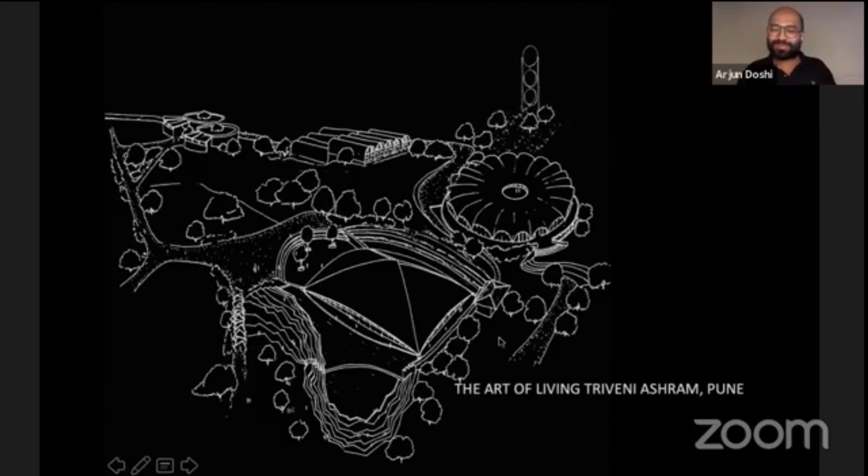Thank you, Anish. Thank you, Rizvi, for such an amazing presentation. Lot to talk about it. Thank you, Anish, Design Owl. Thank you, Srini, it is great. I think we're not doing justice meeting Srini over the virtual platform. Meeting him in person is quite exciting, and there's a lot of energy around him, and that gets probably passed on to you somehow.

This is the barren part of Pune, the northeast part, where as you go towards the Marathwada side the land becomes barren, and the actual topography is all contoured with a lot of hard rock available. So this is a 300-acre site, out of which today I'll just be showing you around 30 acres, which has been developed currently. There have been other parts touched upon, but not yet developed completely.

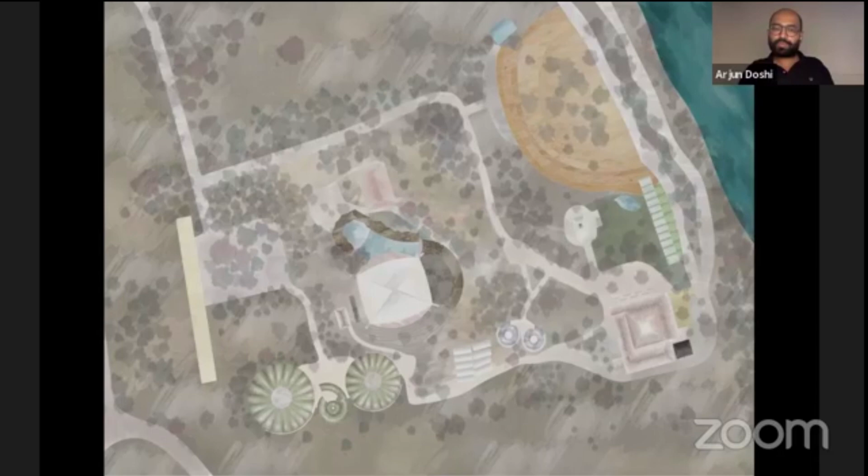So when we got this project originally, the client was actually looking to build something as a temporary structure. So we started with this small structure, a doctor's cabin. They have something called Panchakarma Kriya, wherein they use techniques to vitalize all the human body points, with a proper professional doctor for that. But they did not know if it would work in Pune, in the ashram, what kind of response they would get. So at that time, they wanted a small pavilion kind of thing.

It had a very tight budget. So what we did is we purchased this pine which was locally available because of Mercedes-Benz and Jaguar companies based on the industrial belt of Pune, where this material is used, in which the cars come packed. So this is actually material which is used for packaging of these cars.

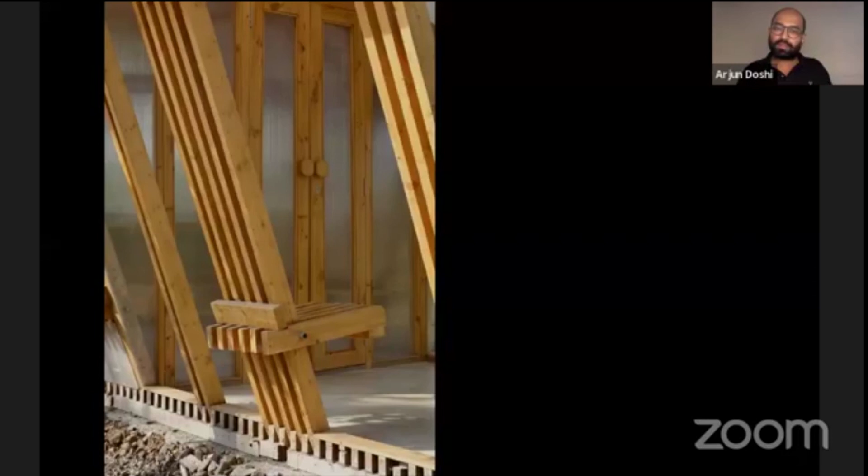So if you see, these are all nail marks on top of this. So we just rubbed it on top. The structure was that the complete structure was just bolted on this half-inch GI pipe. So the whole structure was sealed through that. There were no nails used to tighten the structure.

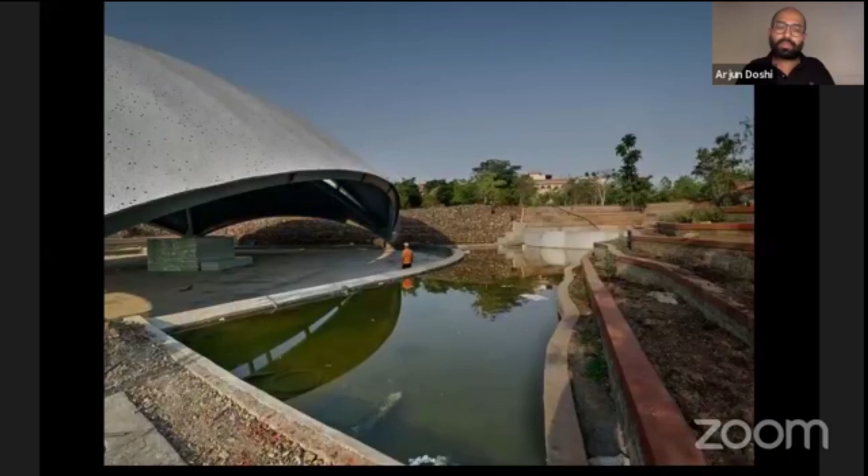It has a metal frame covered with ferro cement as a skin roof. This just sits grounded on 4 points. When we were discussing, there were specific kinds of requirements for the structure. So we went ahead and studied all the Vastu, what basically is required in Vastu, and we worked out the complete sun movement which the Vastu revolves around.

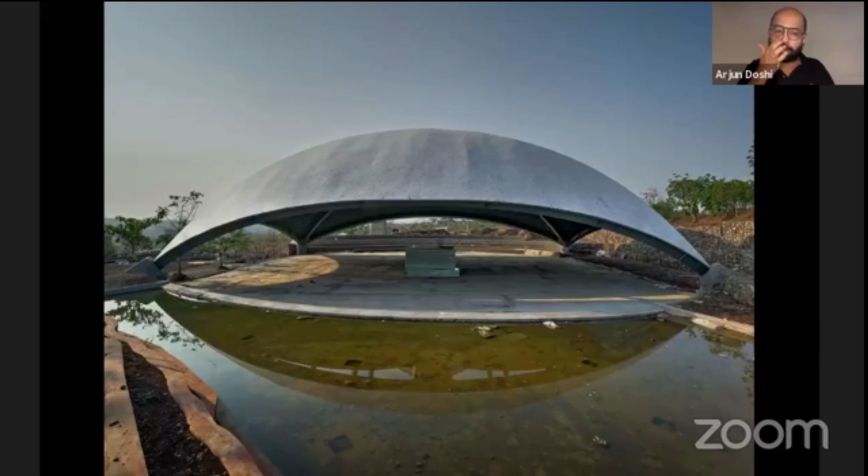And we were able to add a landscape around it because of that. So we were able to add a water body in the northeast which already had depression. We cut some on the western side and filled a little bit on the eastern side, and it was exactly situated northeast facing.

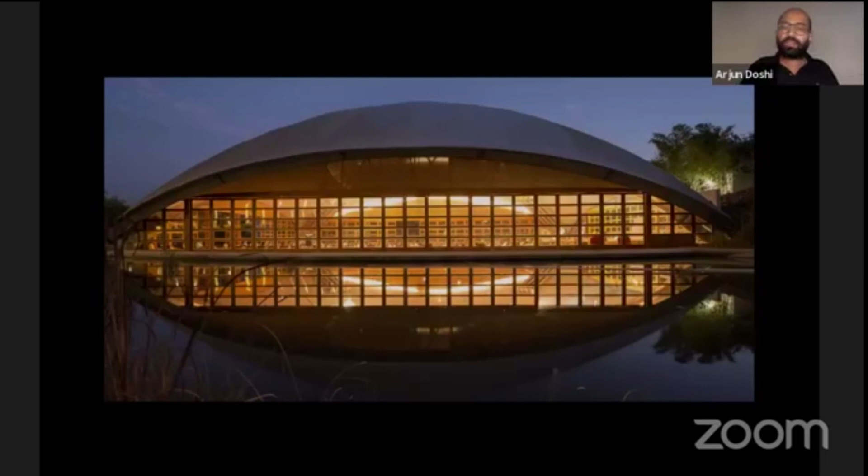And what we did is, because it was a ferro cement roof, we cut the roof in two, so the hot air could escape. Ferro cement being thin attracts a lot of heat, so the heat could escape through the void. And to naturally ventilate it or cool it in the months of summer, monsoon and otherwise, Pune is beautiful, so we don't have to worry much about the kind of heat it attracts.

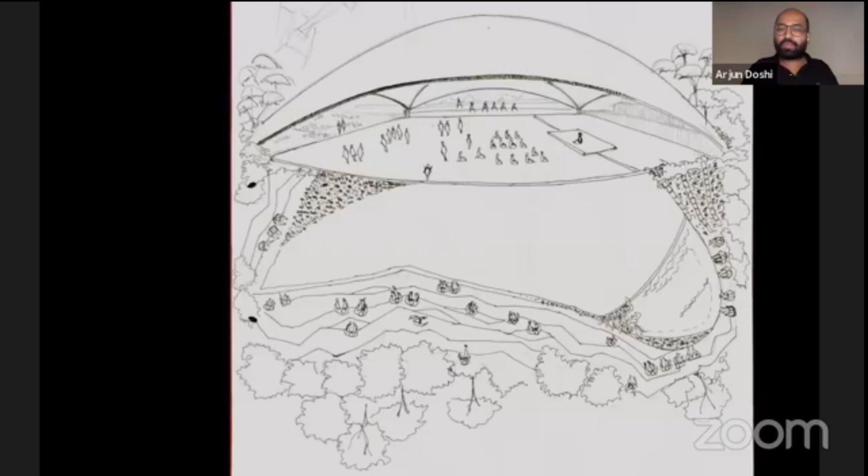It is the summers, the 2 months of summer, which was a point of question, when they used to use the hall quite frequently. So what we did is we created a landscape which would attract passive cooling. This waterfall is a movement of water around the site, triggered every time the pump is switched on, pumping water to the overhead tank, and eventually falling into the hall periphery, which cools the hall on the eastern side. And the cut and fill is the part which we did.

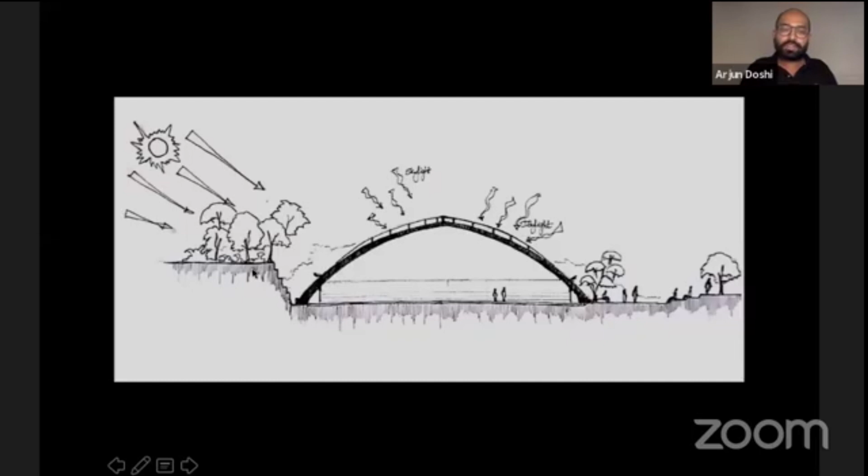So this is the west. We cut on the western side, so the shading of the trees could be done in the afternoon, so all the cool, heavy air could travel down and cool this bottom. And on the eastern side, we have the small entry pavilion kind of thing, wherein people passing by do not disturb the users of this hall if the doors are open.

So it was a typical metal frame structure on which the ferro cement was casted. To reduce the cost further, what we did is we disconnected the four foundations, and because of that disconnection, all four foundations were independent, and the ferro cement was directly tied on.

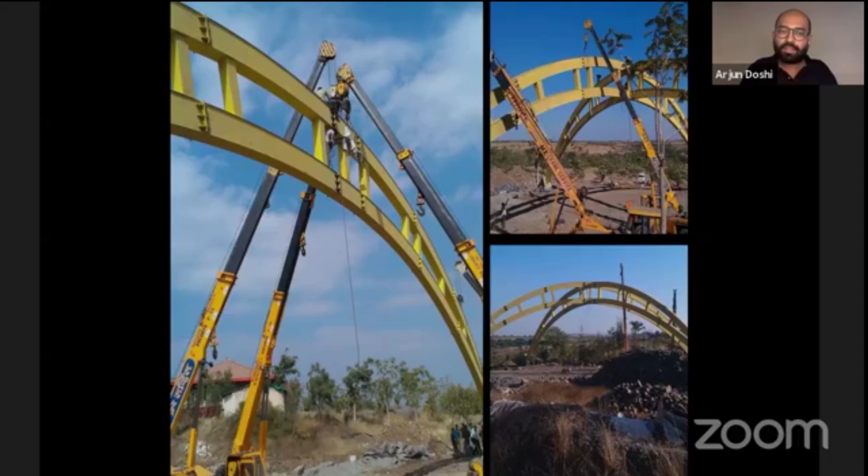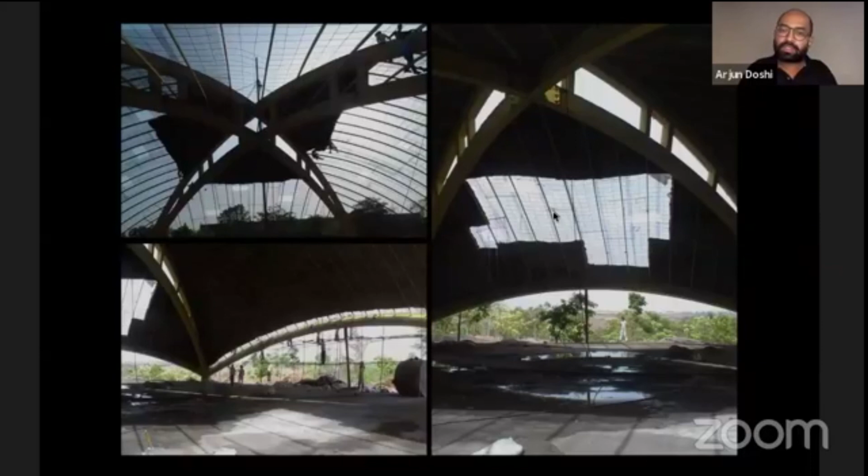So this is the kind of process which we went through. While casting, we had to cast in a manner wherein the weight was added at a certain point, and like a snail, you keep on rolling it up. So the whole structure, when it settles down, will push out the foundations in a simultaneous manner.

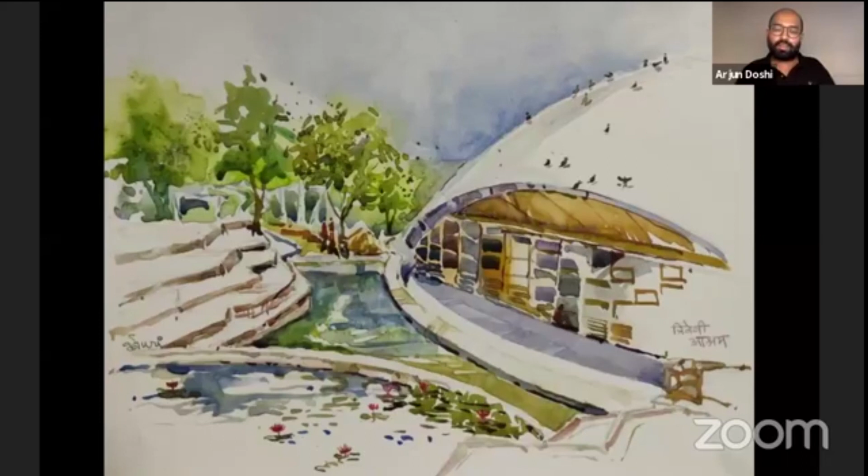As I said, we concentrated a lot on the landscape because for the pavilion, landscape played a major role, since the pavilion was just like a roof on top. But we imagined people using the space throughout the day for some kind of meditation, yoga, or any kind of course, used for multi-purpose courses of all different kinds.

Our imagination was that if a person has to spend 8 hours within this, what he sees outside should be as comfortable as possible, because the region was quite harsh in the month of summer. Everything will dry down, the whole landscape will be golden. So the landscape changes color throughout the season - winters is different, monsoon is different, and summers becomes absolutely golden.

Everything dries up. And this water is also the irrigation water, the grey water, which is recirculated throughout the ashram, which keeps on filtering by sedimentary filters.

Even the entry pavilion, the client had an imagination of a grand entry. So we created a pavilion for the entry, wherein they pass through a series of boxes where they lose their orientation by the time they are at the entrance of the pavilion.

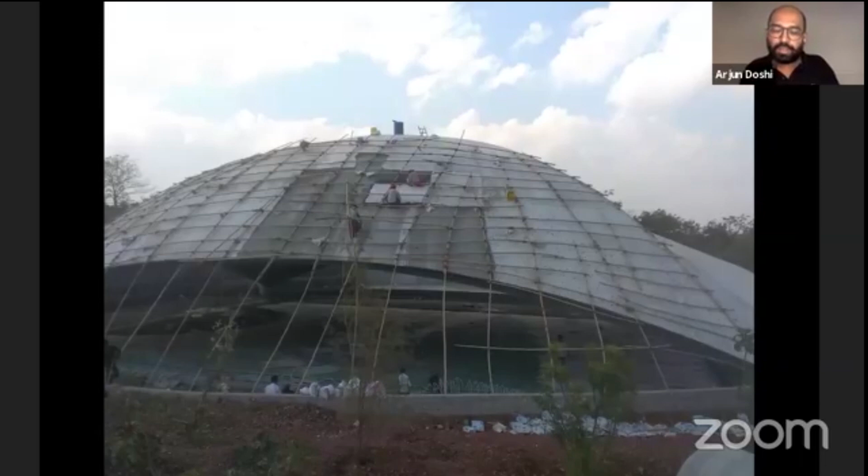A little bit about the construction process. After we had completed all the ferro cement and metal work, there were a few challenges we faced while doing the China mosaic and curing it. We did this China mosaic as insulation and a weatherproofing material. Cement didn't work here because you couldn't work under it the next day - you had to pour water on top to cure this part while working below.

So we introduced lime as a material, which also added to the insulation of the complete structure. And after the China mosaic was complete, we also added radiant cooling in the flooring.

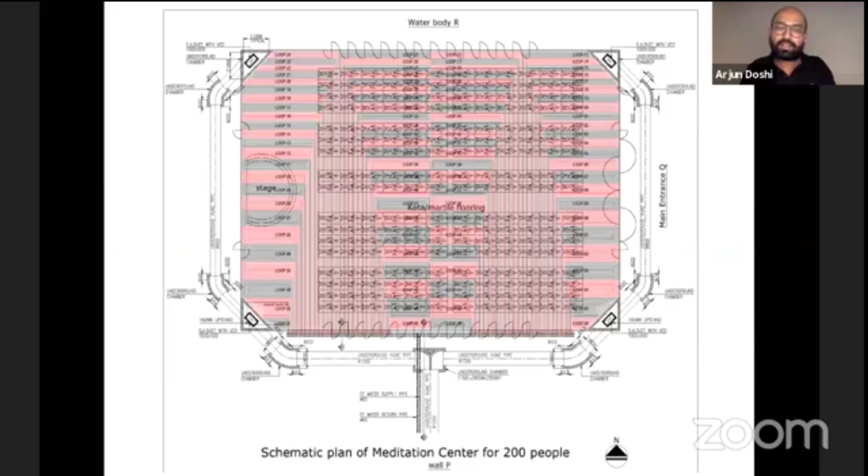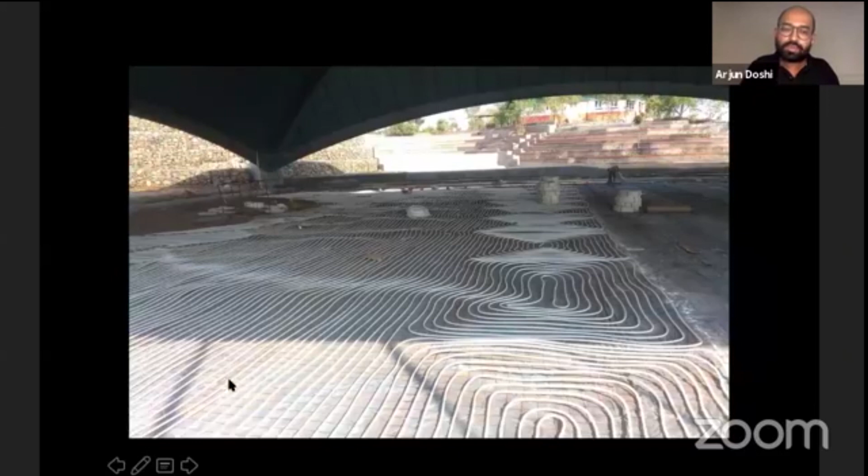So this complete floor is radiated with cold water. We pass 18 degree water in summers, which cools the complete floor you're sitting on. Each pipe length was worked out in a manner that the water traveling time is equal to the start and stop time.

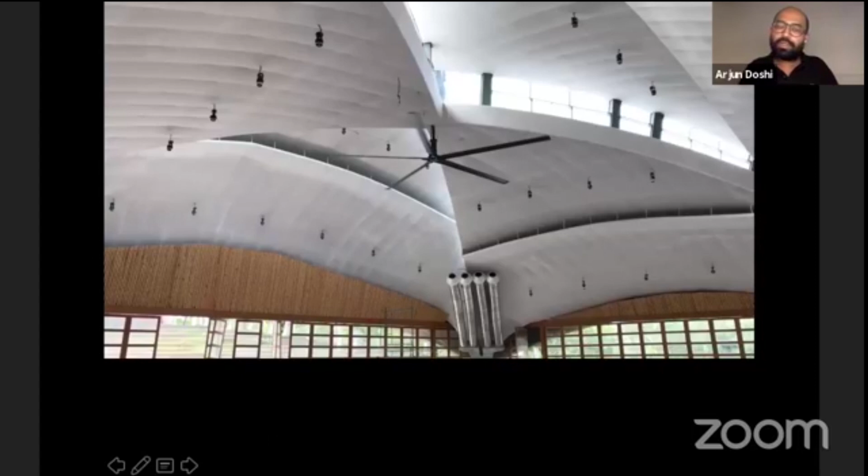We also added this HVLS fan and radiant cooling system. If this whole system works in tandem, all the doors can be open and you can use the whole system without any doors closed - it can be a completely open system.

During this process, we did not get the complete project in one go - there were always bits and pieces which the client kept on giving us. While this hall was getting constructed, they said we would need a large scale toilet, since if a crowd of this scale comes here, we would need a few toilets. So again, the Vastu factor came into the use of toilets.

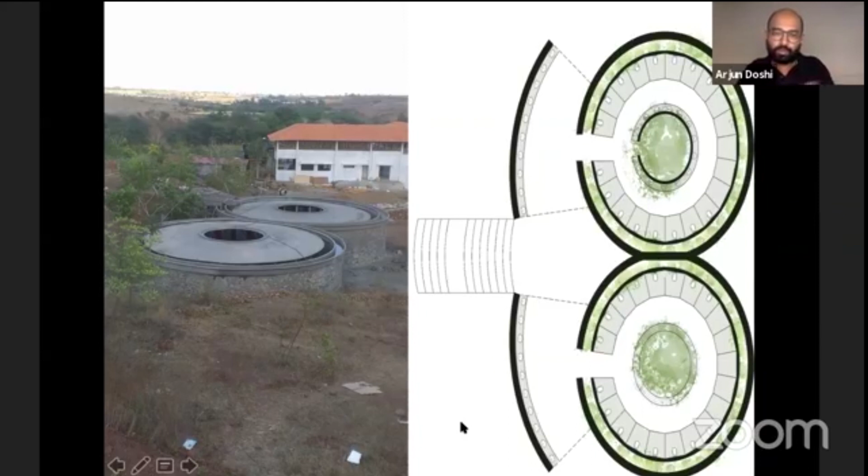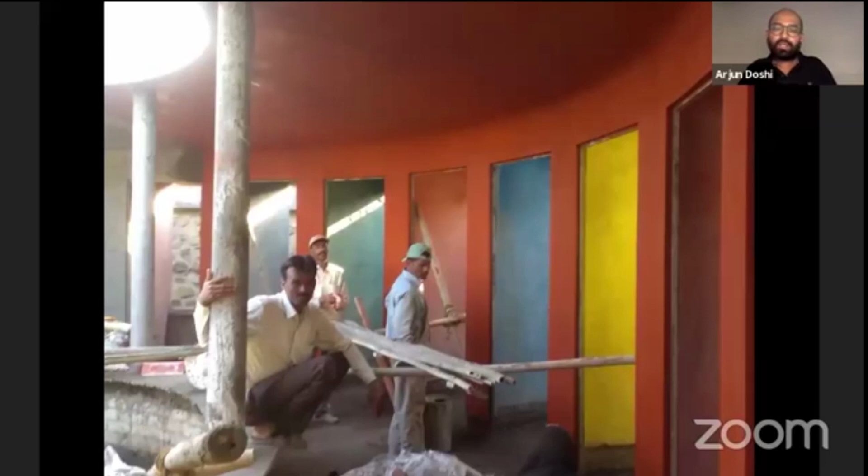We worked out a method wherein we could have the WCs where it was possible and the shower area where it was not possible to have WCs. We worked out this radial system which gave a sense of courtyard and the natural feel of the ashram, where you could have plants growing within the toilet block.

And to cut down the cost, we used oxide colors within the complete flooring and wall pattern to bring down the cost on ferro cement. Basically, you'd have to construct ferro cement, then plaster it and paint it with something. Instead, we directly used oxide colors as the plaster form in IPS, and played around with a few colors to create an environment that would be absolutely comfortable even if it was not cleaned for a couple of days.

This is a community based usage, so there are no employees within the ashram. The complete property was run and maintained by the ashramites, the people who used to stay within the ashram. They used to cook, clean the whole ashram, and would have participants coming to be part of the course.

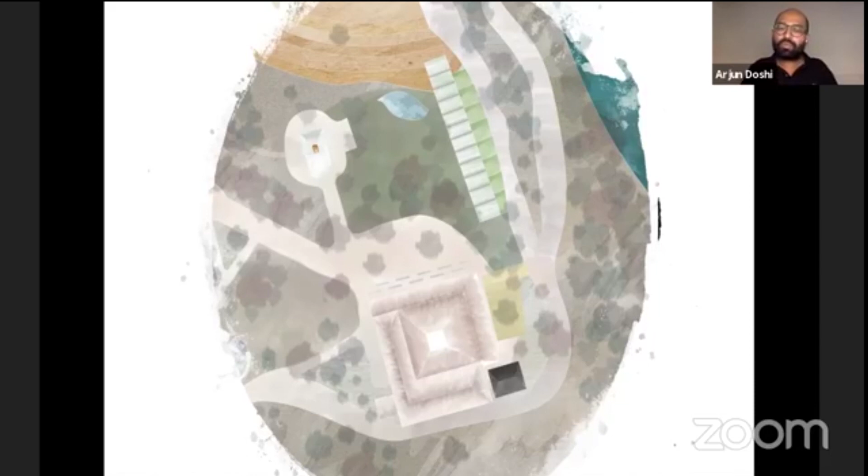So this is how the toilet looked once complete. And after this, there was an ongoing kitchen and hostel block which they wanted to convert into a kitchen dining space. We were involved in the placement of the roof and the way the whole building was oriented, because the RCC frame was already ready by the time we were involved in the project.

So we added this traditional form of Pune, the Vada form, wherein it's open in the center, and it's just beside the river. So you get this beautiful view, and people can sit on the floor and have their meal, and you can have really beautiful effects probably in the monsoon month.

We also added a small pavilion right beside it for the teachers' dining area, again using the same locking technique with half-inch GI pipe. The whole structure is locked on the half-inch GI pipe, and the plinth acted as a seat. The river runs across here, so you could visibly see it.

The next project we got after this was the Ashramite Housing. Nine was an auspicious number for them, so they said anything built in nine is always a success. They gave us a space where we had to make nine rooms, with a very small footprint within which we had to fit those nine rooms.

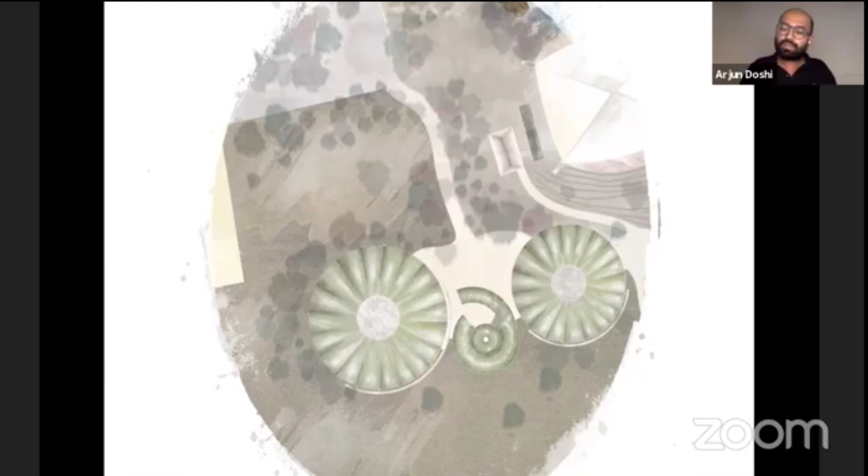The next project happened by accident. The system worked such that every time they assigned us a project, we had to work out a budget, present it to the trustees, get it approved, and then start work - like hiring a new architect for each building. The client, the trustee group, used to always complain about a lot of ferro cement cutouts.

Ferro cement, weld mesh and chicken mesh come in rolls, and to make all these geometrical shapes we need to cut it, so there were a lot of bits and pieces left around. They used to always complain about that, so I said, if you need to make a structure somewhere, I can probably create a retaining wall with it.

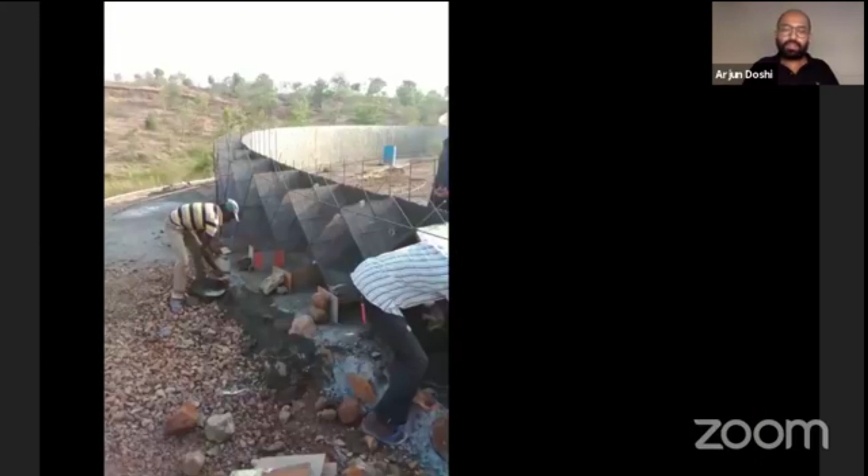We worked out a method to create a retaining wall that was just 2 inches thick, with ribs coming out of it. At this point, the client did not even have a project in mind - it was just a round plinth of a certain diameter. In this conversation, they said, okay, we need a hostel block on top.

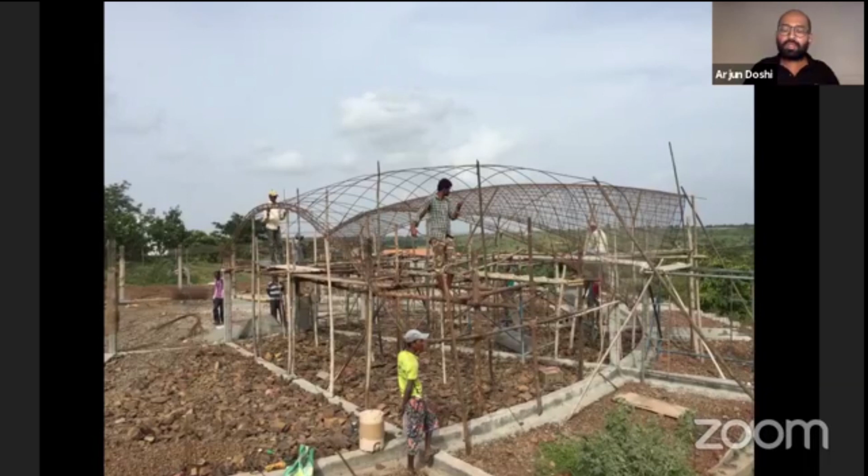They planned to have people from rural parts of Maharashtra come for a youth leadership training program, called the YLTP course, where they train the youth for a month and try to employ them somewhere. So the plinth was worked out on ground.

That's the kind of strength or geometry you can work out with ferro cement - in compression it works beautifully, and tension is added just where required. This whole thing could become monolithic, connecting the whole system, and it's just on ground. Like this is a retaining wall - we filled it up, and on top of this we started the foundation, and the mesh started taking shape.

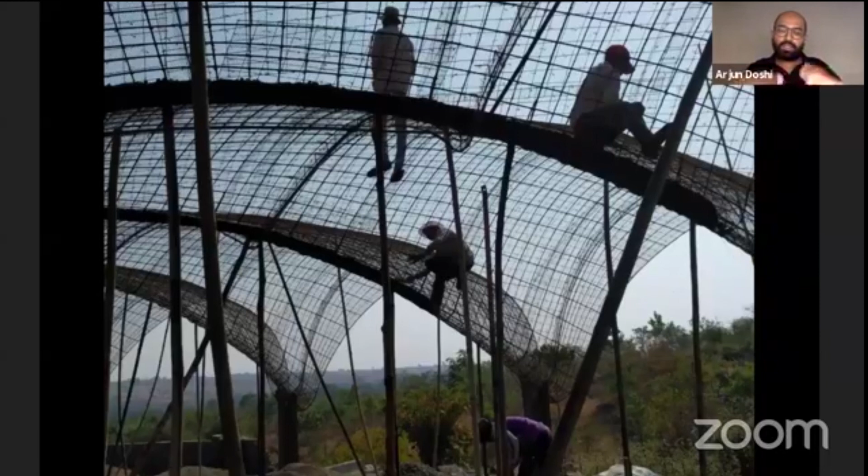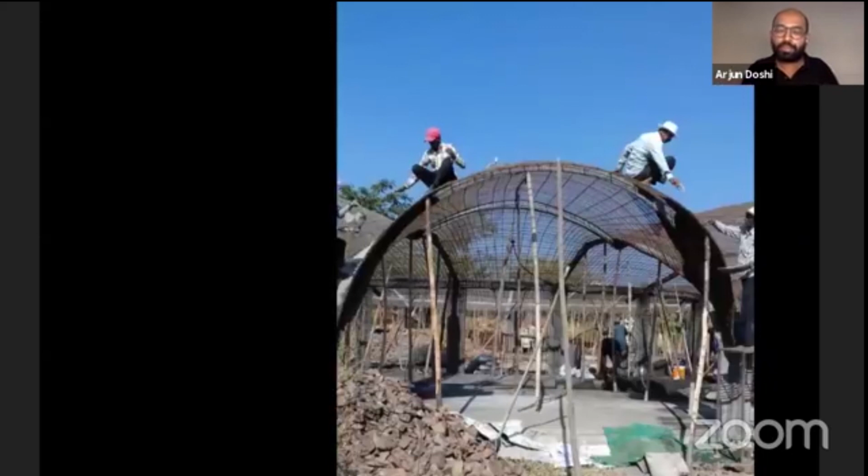This is a hyperbolic paraboloid structure curving on 8 different curves. What it did was create a very strong geometry which itself could sustain, allowing very thin columns and a very long span, so we got a huge space in between that could be utilized.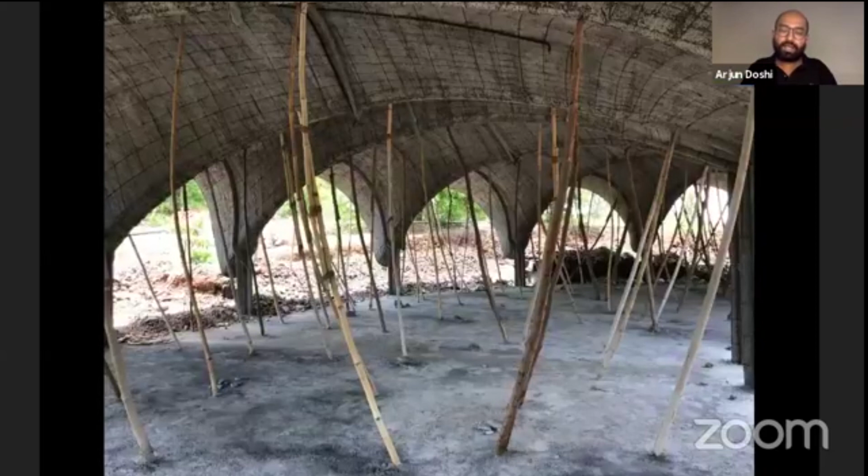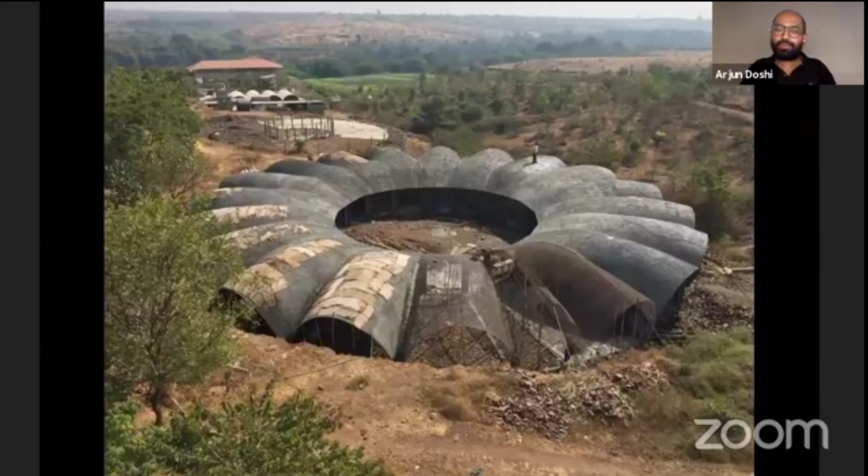Again Vastu played a role, because according to Vastu you cannot have your head in a certain direction, but when you have a round shape, a lot of those questions get answered on their own - people don't question you much. So round worked beautifully. While we were doing this, our structural engineer was quite skeptical about this failing in some manner.

So this was like a notch he had left - if it failed somehow, because it would start pushing from one side, this is where it would crack. We were happy enough that nothing of that sort happened, and we were able to do the China mosaic on top of it, which tried to resonate with the landscape around.

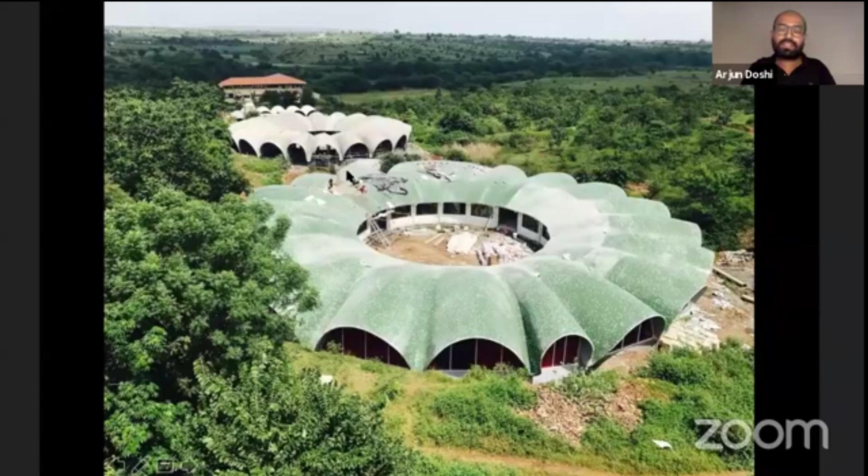We even added another pavilion ahead of it, so it became a ladies and gents hostel block, and the retaining wall then played a vital role - we raised it and made a complete bench around it, so that became a seat. It became a complete structure connected in every manner, which was not planned for - it was just thought of, and in that conversation it went ahead and eventually got built.

It is one of the most experimented forms of ferro cement we've tried till date, and this paved a way - we added a toilet block in between.

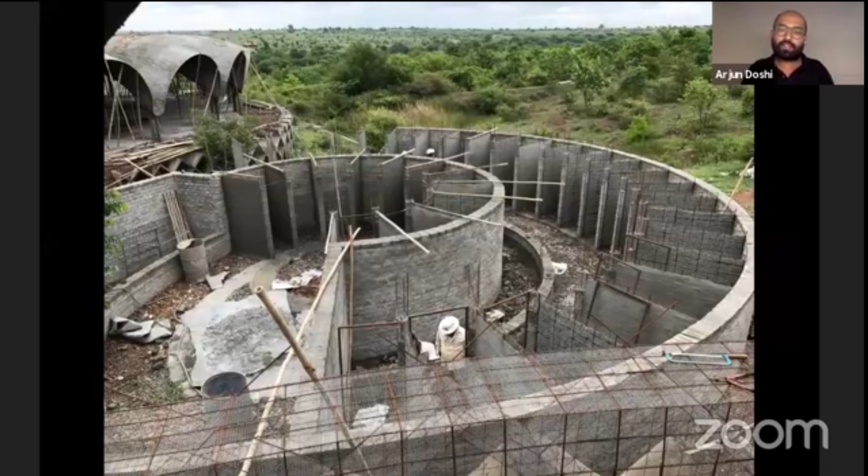Again, the space given was a very tiny space while constructing this hostel. So what we did is we created a snail kind of a system. The gents enter from the right hand side and the ladies enter from the left hand side. They're absolutely close, but none of them disturb each other.

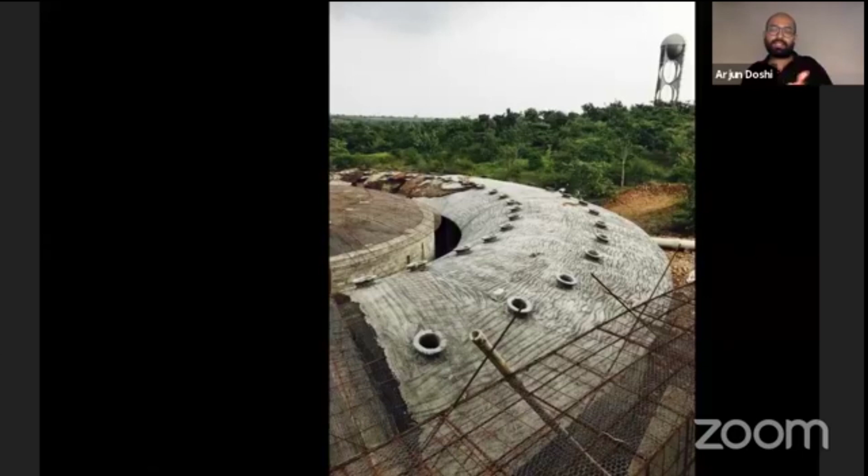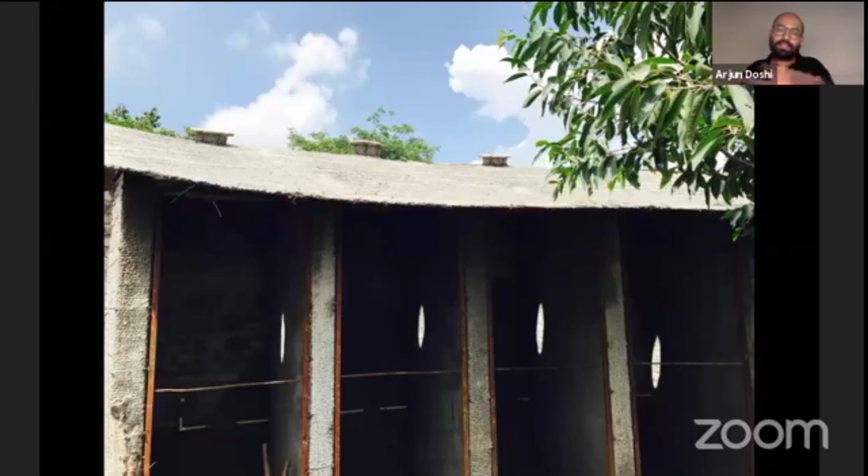Only the outer walls, where the plumbing used to run, we did in brick wall. Everything else was done in Ferro Cement. And we could not have windows because this was right behind each other, like we did for the other toilets. So what we did is we gave one skylight to each cubicle. Each cubicle had its own independent skylight, and that created its own kind of sciography.

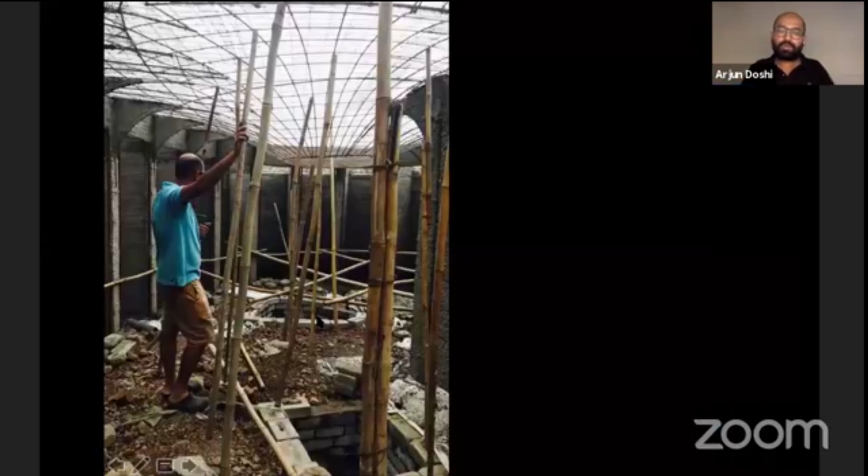What we tried here is something like a reverse dome. This whole roof was coming to a point where there were absolutely no columns. So we did a reverse dome wherein the whole ring comes in and is tied at this level, and this is where it gets tightened up. The stress is coming here and getting distributed here. If this ring is removed, the whole structure would open up like a basket - a woven basket where the center is kept open. This is how the ladies' toilet worked out.

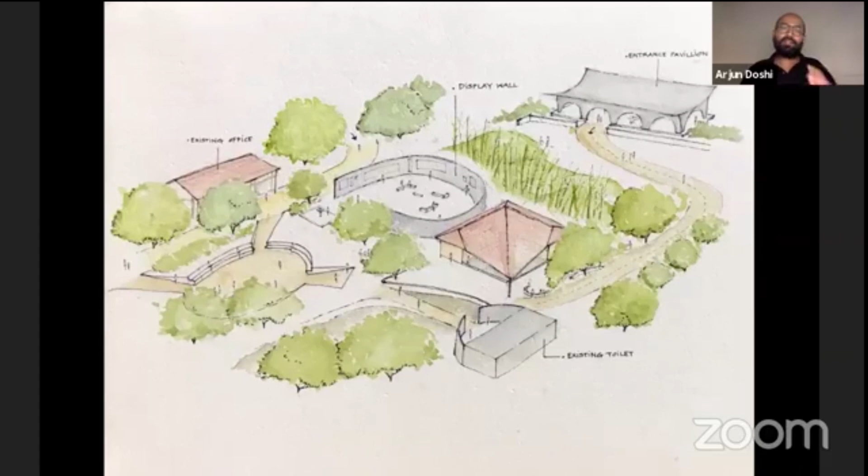While all these structures were going on, the ashram was still acquiring a lot of land around it, because a lot of land was promised to them but they had never gotten possession of it. So the ashram never had an entry gate. Every time we visited, we used to have a conversation with them that we should have an entry to the whole ashram, because people used to just randomly enter through a small gate, and they always had this pre-planned notion of a gate which they have in Bangalore.

Right from the start, with the pavilion also, when we were in conversation with the client, they used to always refer every project to Bangalore, because the Bangalore ashram is already constructed. There are close to 22 ashrams around the world, and all look similar - all on the lotus pattern designed in Bangalore. That's what they wanted to actually construct here. That's when we thought that if they want something like that, they probably already have the architect for that. So if they do hire us, we should try and offer something different.

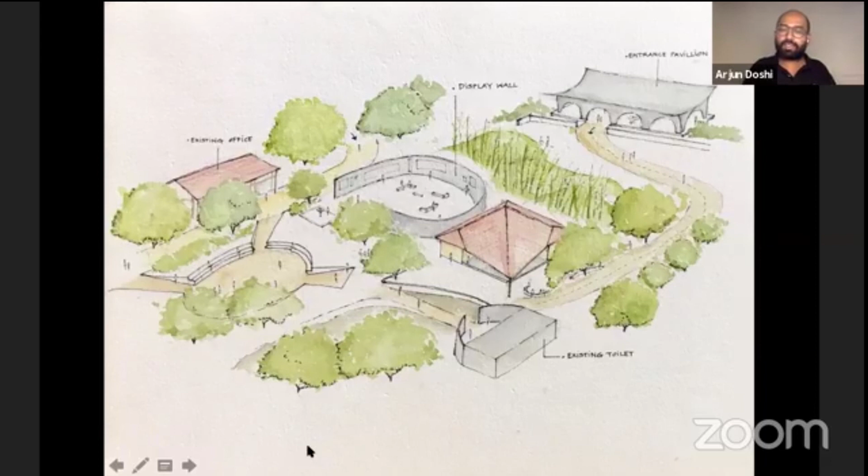So we had a lot of structures already existing at the entry. We were trying to stitch all of them together by adding interventions. We had a pond in between with a sitting area. We had a display wall showing all the courses and functions going on in the ashram. This was an existing canteen, existing office, and existing toilet. What we did is we added this pathway through a farm.

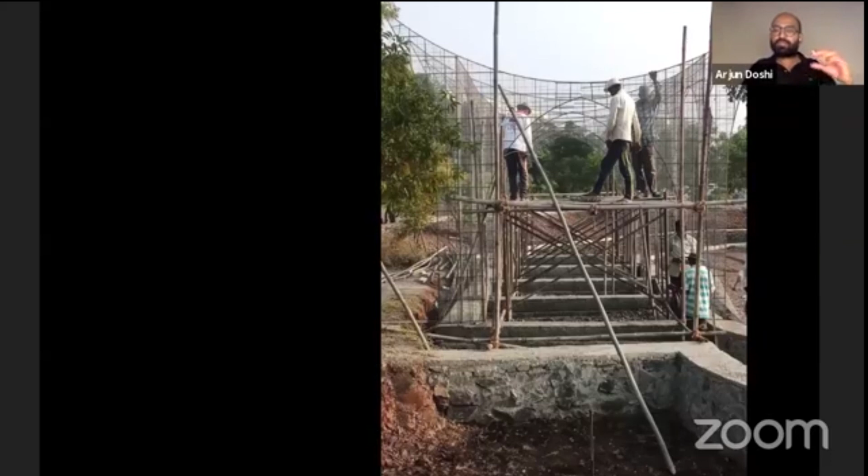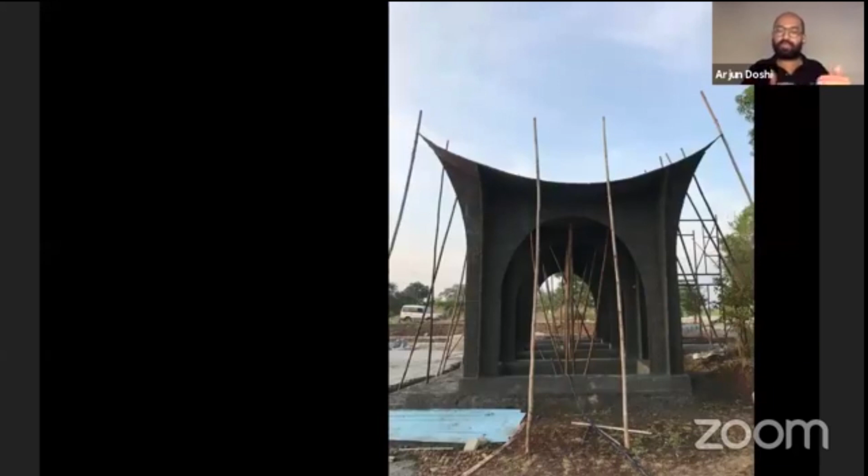People used to enter straight here, which we changed, and we added this pavilion instead of a grand lotus entry - which again spoke of a certain scale, space, or feeling that you've arrived somewhere and you have to go further now. It's like a change of mode - you've arrived at a certain point and have to go ahead now in some other mode. So this is what we created.

This was just constructed during the lockdown - it was partially constructed during that time. Then we added this beautiful black oxide color on top of it. So this was the idea, and this is where you enter from.

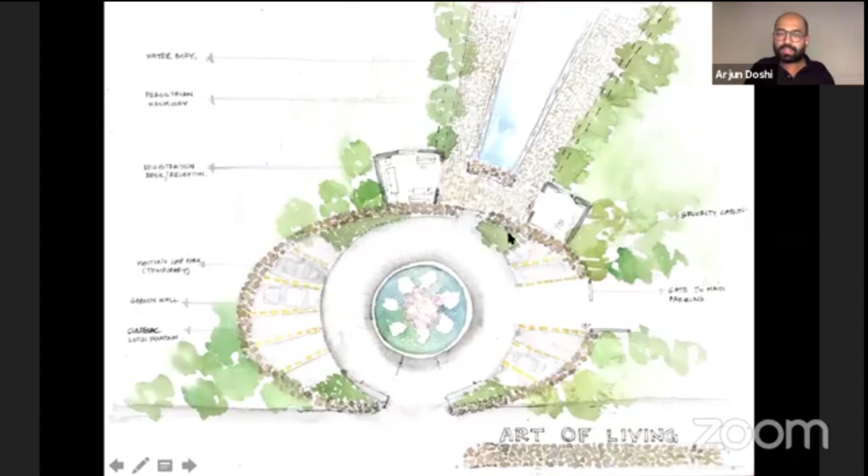Again, a sense of orientation gets lost. You are passed around a circle, and then you can go and park. If you have a temporary thing, you can just park your car again. This is where the pavilion is created, and we created a water body with its logo and stuff. This is how it turned out to be.

This is the entrance where you imagine you can go beyond, and it creates a sense of thought - like what is beyond? If this is the gate, what is beyond this space? That inquisitiveness stays, and you explore the whole ashram. Thank you.

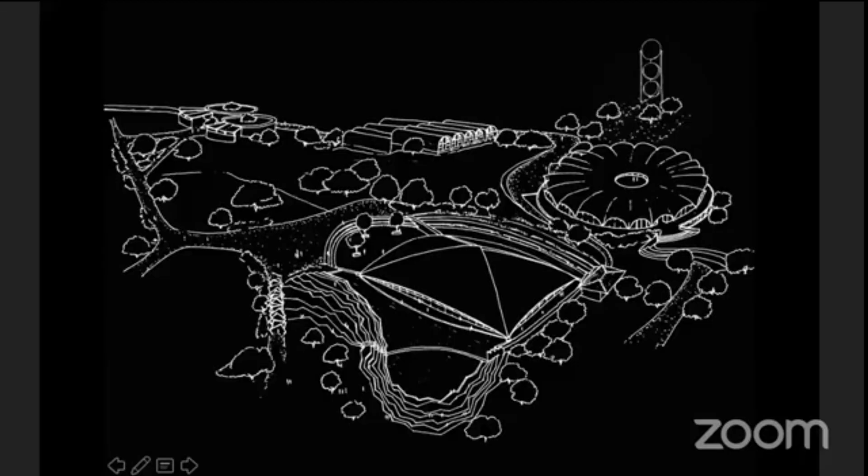Thank you very, very much, Arjun. Lovely to see that work and the organic and ongoing development of this ashram. I know it's getting added on and expanded bit by bit, but it's lovely to see how you're able to stitch all these diverse elements together and layer this space to really offer an experience to the user.